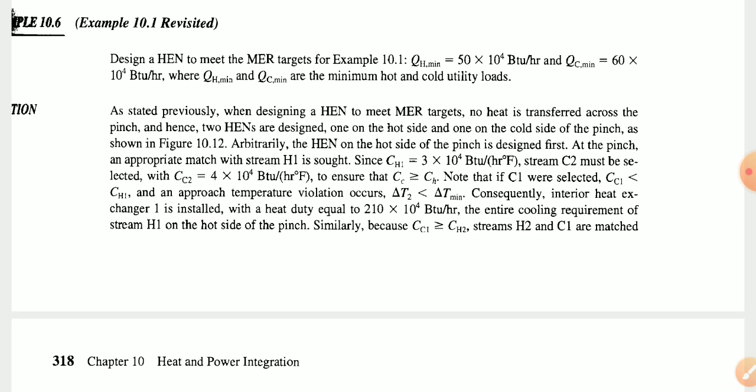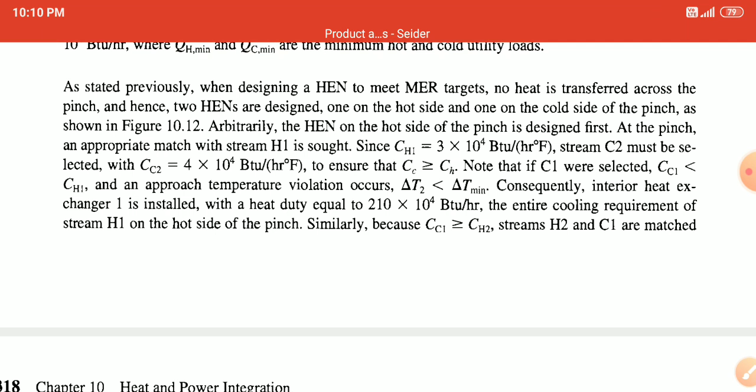Target for example 10.1 basis we will look at: QH minimum is equal to 50 into 10⁴ BTU per hour and QC minimum is equal to 60 into 10⁴ BTU per hour, where QH minimum and QC minimum are the minimum hot and cold utility loads. Based on this we will see how to solve this design.

As stated previously, when designing a heat exchanger networking to meet maximum energy recovery target basis, no heat is transferred across the pinch point. Pinch point design we have already discussed.

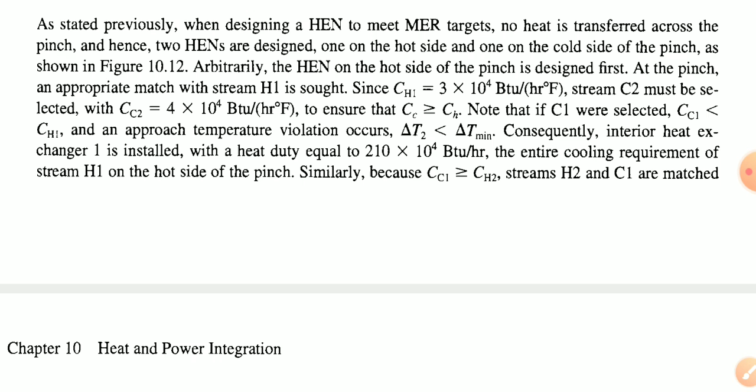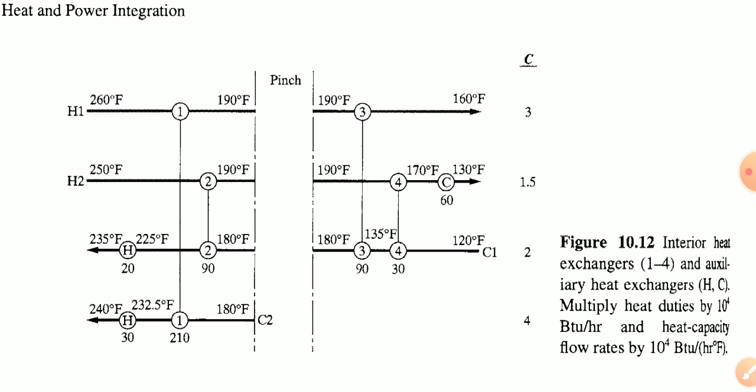This is the graphical system for 10.12: interior heat exchanger 1 through 4 and auxiliary heat exchanger for hot and cold fluid, multiply heat duties by 10⁴ BTU per hour and heat capacity flow rates by 10⁴ BTU per hour into Fahrenheit.

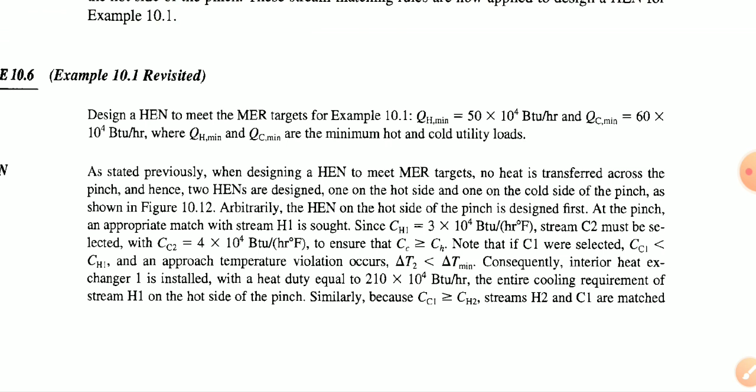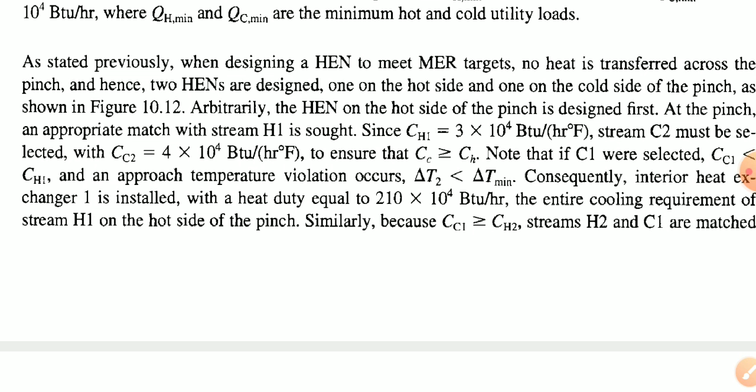As stated previously, when designing a heat exchanger networking to meet maximum energy recovery target basis, no heat is transferred across the pinch point, and hence two heat exchanger networkings are designed, one on the hot side and one on the cold side of the pinch point, as shown in the figure.

Sorry. Okay, arbitrarily for the heat exchanger networking on the hot side of the pinch, design first one at the pinch point.

Appropriate match will be stream H1, since CH1 is 3 into 10⁴ BTU per hour Fahrenheit as given. Stream C2 must be selected with CC2 equal to 4 into 10⁴ BTU per hour Fahrenheit, to ensure that CC is greater than or equal to CH for hot phase and cold phase.

Note that if C1 were selected, with CC1 less than CH1, then an approach temperature violation occurs where delta T2 is less than delta T minimum.

Consequently, interior heat exchanger 1 is installed with a heat duty equal to 210 into 10⁴ BTU per hour, meeting the entire cooling requirement of stream H1 on the hot side of the pinch point.

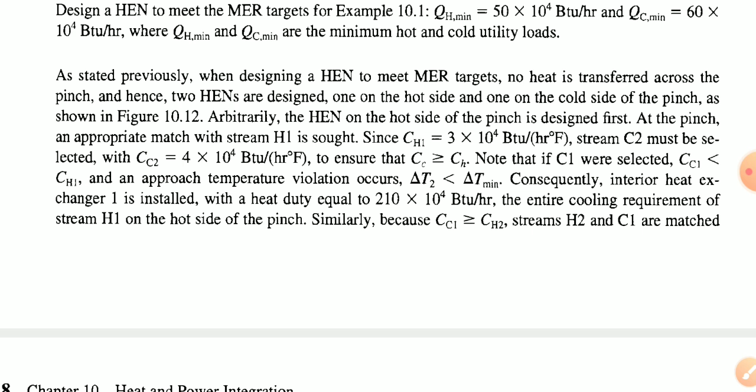Similarly, because CC1 is greater than or equal to CH2, the streams H2 and C1 are matched on this diagram's basis.

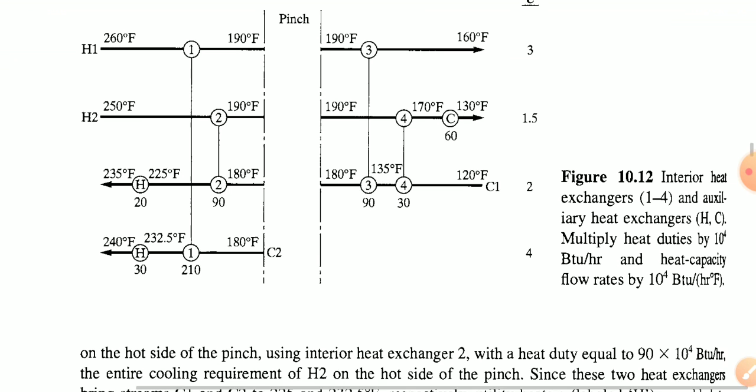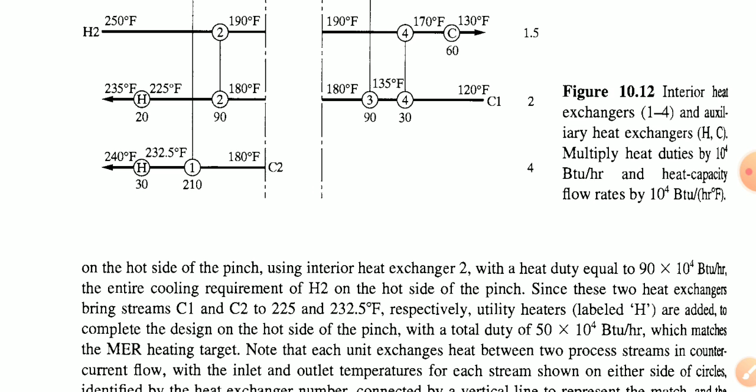Now for interior heat exchanger 1 through 4 and auxiliary heat exchanger, hot and cold phase, multiply the heat duties by 10⁴ BTU per hour and heat capacity flow rate by 10⁴ BTU per hour Fahrenheit. Okay, that covers this discussion part.

On the hot side of the pinch, using interior heat exchanger 2 with a heat duty equal to 90 into 10⁴ BTU per hour, meets the entire cooling requirement for hot phase 2.

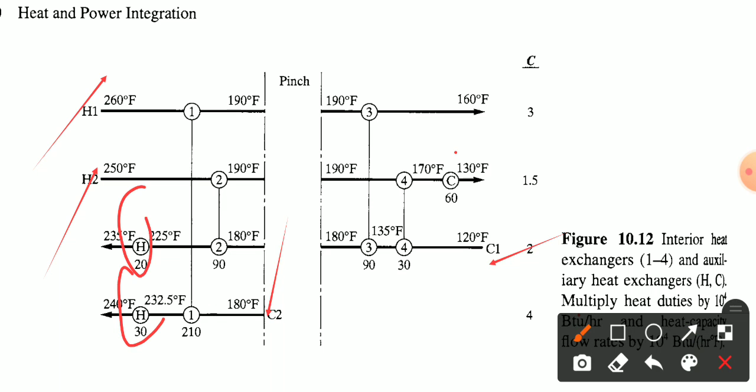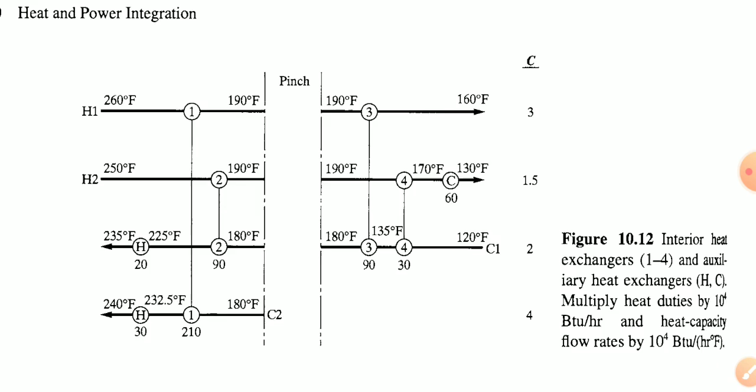This is on example 10.1's basis that we are looking at. Now, on the hot side of the pinch, using interior heat exchanger 2 with a heat duty equal to 90 into 10⁴ BTU per hour, it meets the entire cooling requirement of H2 on the hot side of the pinch point, since these two heat exchangers...

...bring stream C1 and C2 to 225 and 232.5 Fahrenheit respectively. Now utility heaters labeled H are added to complete the design on the hot side of the pinch point, with a total duty of 50 into 10⁴ BTU per hour.

Simply on this basis, on the hot side of the pinch point, using the interior exchangers, we add to complete the design on the hot side of the pinch point with total duty 50 to 10⁴ BTU per hour, which matches the maximum energy requirement heating target.

Note that each unit heat exchanger exchanges heat between two process streams in a counter current flow, with inlet and outlet temperatures for each stream shown on either side of circles identified by the heat exchanger number. Exchangers are connected by a vertical line to represent the match, and the heat duty is noted below the circle associated with the cold stream.

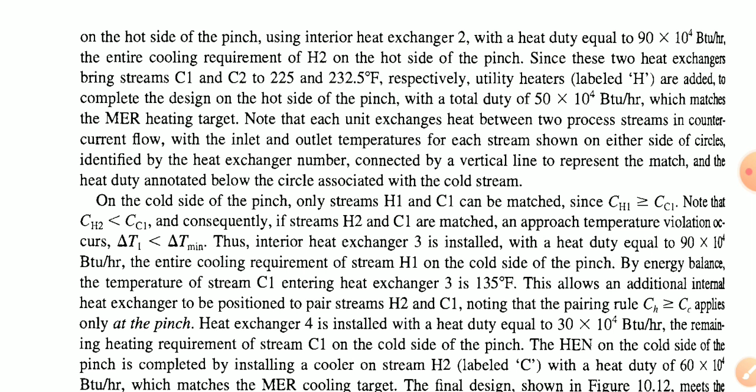On the cold side of the pinch point, only stream H1 and C1 can be matched. On this basis, CH1 is greater than or equal to CC1. Note that CH2 is less than CC1.

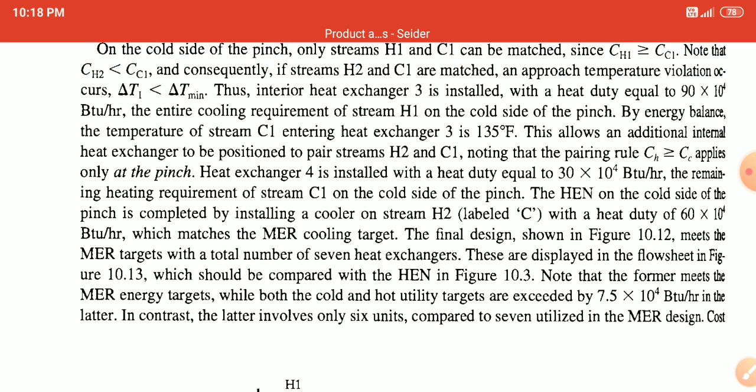Consequently, if streams H2 and C1 are matched, an approach temperature violation occurs, with delta T1 less than delta T minimum. Thus, interior heat exchanger 3 is installed with a heat duty equal to 90 to 10⁴ BTU per hour, the entire cooling requirement of stream H1 on the cold side of the pinch point. By energy balance, the temperature of stream C1 entering heat exchanger 3 is 135 Fahrenheit.

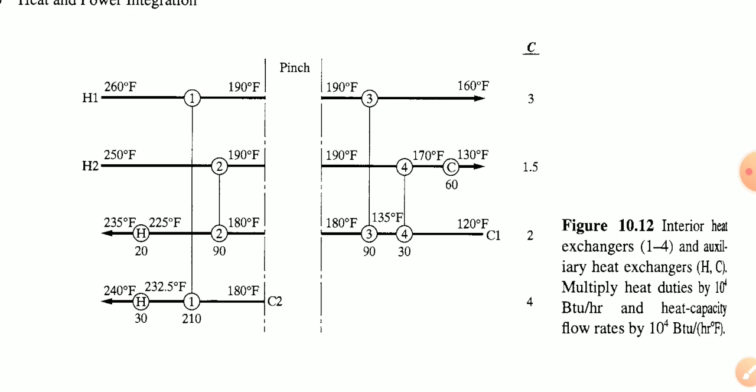Now for this discussion part, let's look at the graphical system.

The heat exchanger network on the cold side of the pinch is completed by installing a cooler on stream hot two, with a heat duty of 60 to 10⁴ BTU per hour, which matches the maximum energy requirement cooling target.

The final design shown in figure 10.12, as we saw, meets the maximum energy requirement target with a total number of 7 heat exchangers.

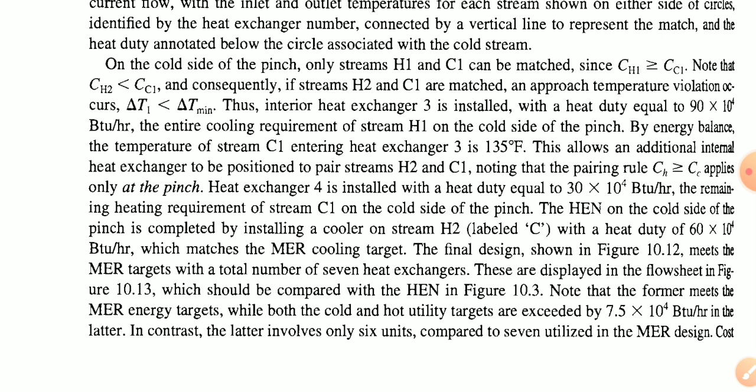These are displayed in the flow sheet in figure 10.13, which should be compared.

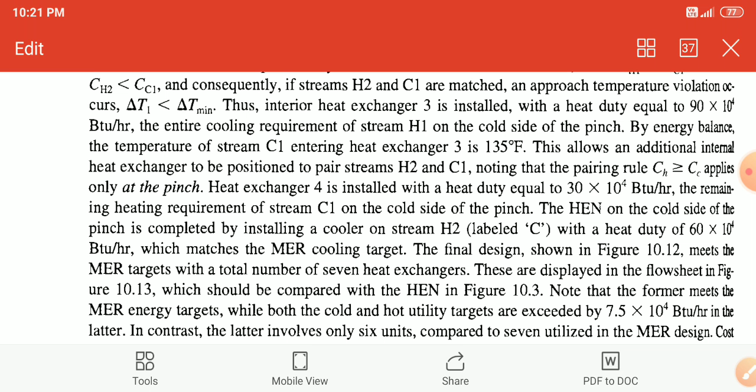With the heat exchanger network in Figure 10.3. Note that the former meets the maximum energy requirement target, while both the cold and hot utility targets are exceeded by 7.5 into 10⁴ BTU per hour in the latter.

In contrast, the latter involves only 6 units compared to 7 utilized in the maximum energy requirement design for this graphical system.

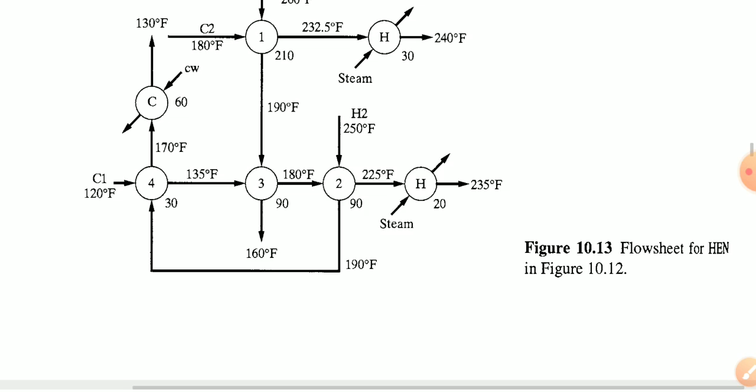Flow sheet for heat exchanger network 10.12, stream is mentioned here.

This is the most important point.

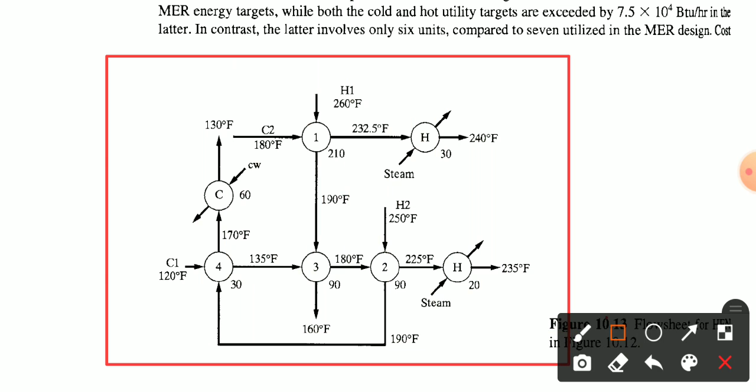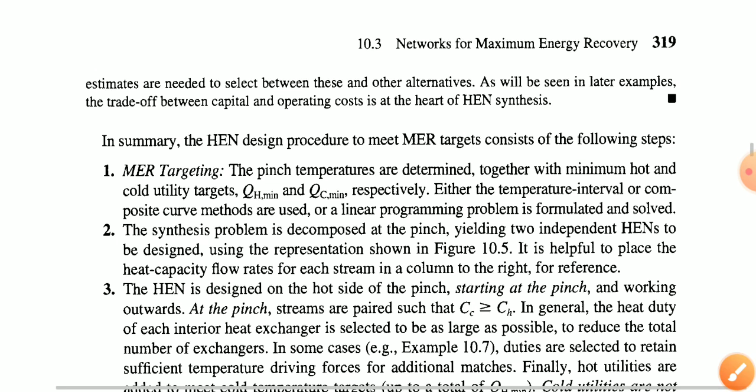Now, cost estimates are needed to select between this and other alternatives, as will be seen in a later example.

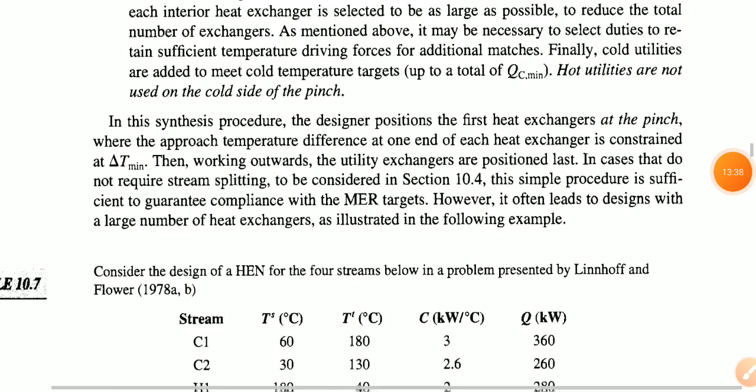Simply in the summary part, there is a trade-off between capital and operating cost in heat exchanger network synthesis.

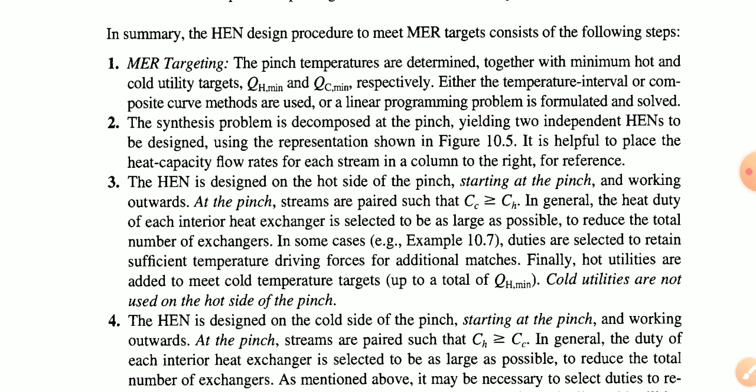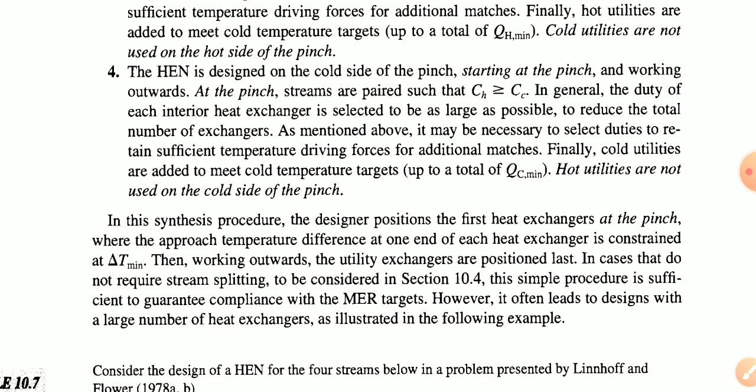Now in this synthesis, the designer positions the first heat exchanger at the pinch point. Graphically, here is where the pinch point is.

Where the approach temperature difference at each heat exchanger is constrained to delta T minimum, and working outwards, the utility exchangers are positioned last, in cases that do not require stream splitting, to be considered in section 10.4. Okay, thank you so much.

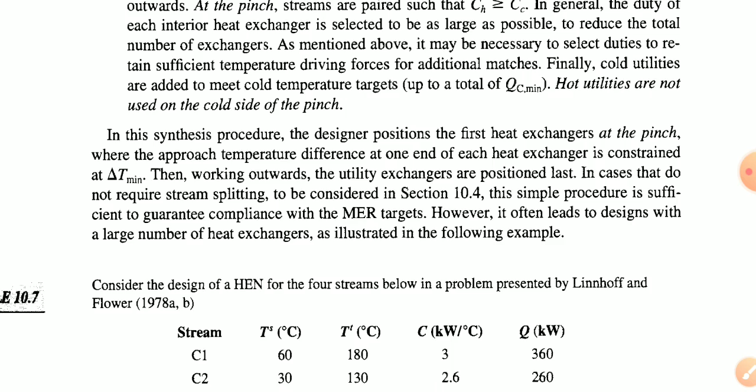Next example, we move to 10.7. Thank you so much.